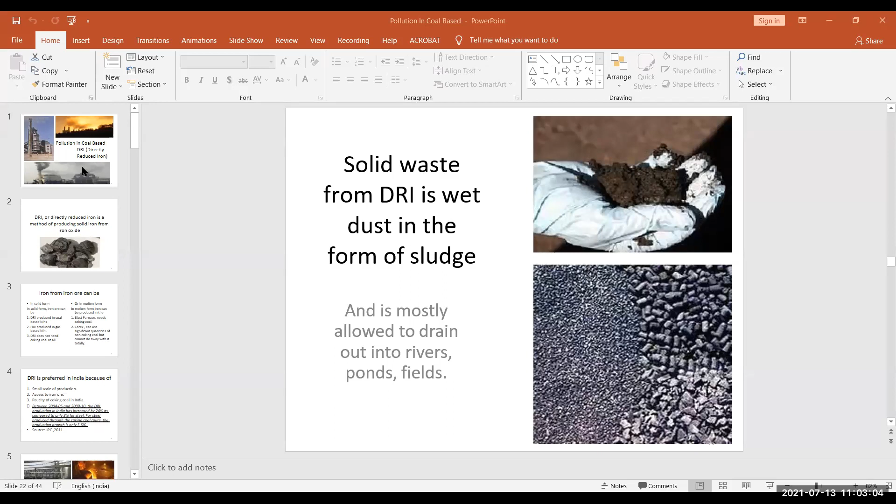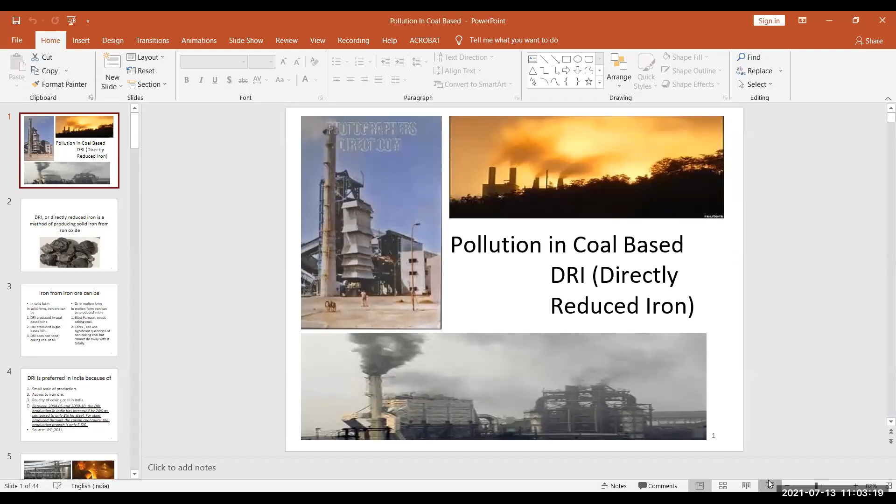Okay, now let's start with pollution in coal based. We already discussed some parts of coal based in the previous class. DRI means directly reduced iron. Okay, was my voice audible?

Yes sir, okay. Then now, what is the pollution in coal based? What is coal? Does anyone know about the pollution in coal?

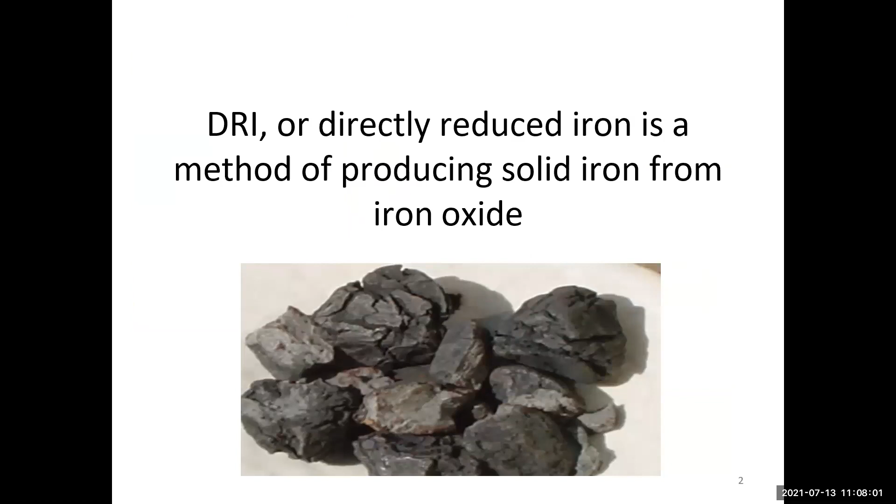Iron from the iron ore can be produced in solid form or in molten form. In solid form, iron can be directly produced in a coal-based kiln.

There is a kiln part, which is a part of the power plant, this is a very dangerous part. Okay, dangerous for the human body.

This black, this type of our particles, black particles are found in it, which move with the air. This is the very dangerous part of the power plant. This is the coal-based kiln.

Okay, HBI is produced in a gas-based kiln, and DRI does not need coking coal at all. Okay, this is the iron from the iron ore can be produced.

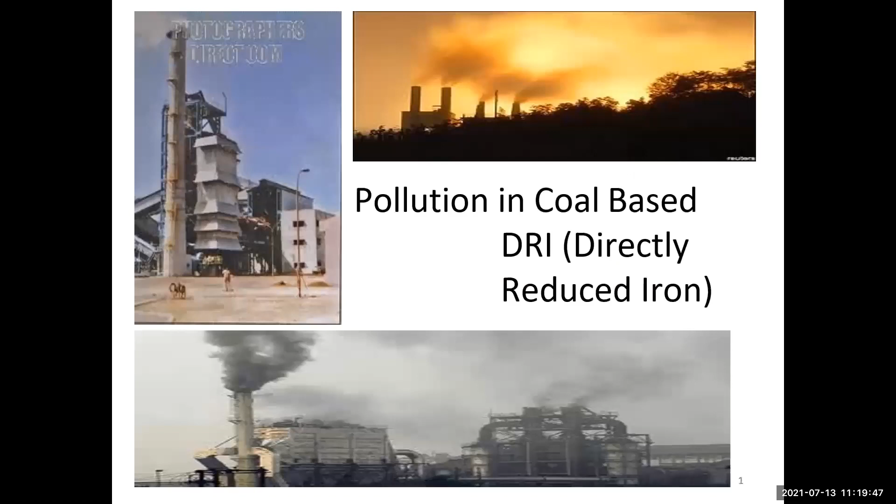Sponge iron is not useful by itself, but can be processed to create wrought iron or steel. The sponge is removed from the furnace called a bloomery and repeatedly beaten with heavy hammers, folded over, and the slag is removed.

Sponge iron is created by reducing iron ore without melting it. It makes an energy efficient feedstock, especially for steel manufacture, used as a substitute for scrap metals.

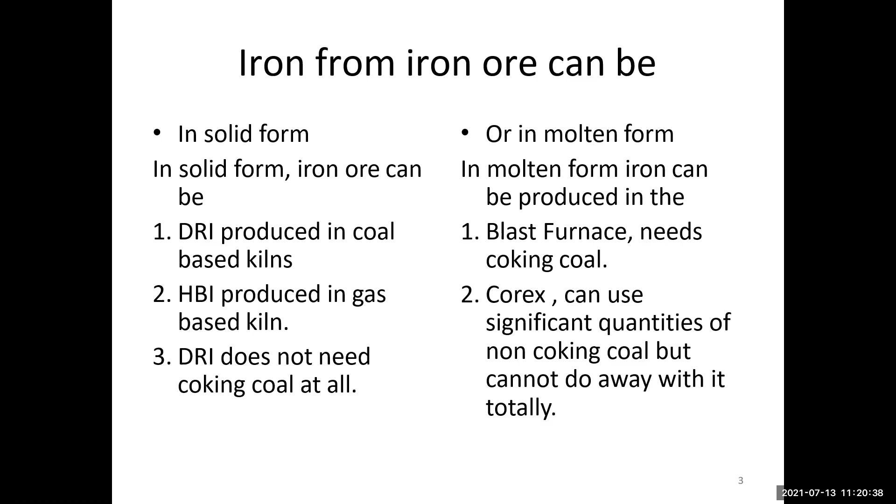It is now preferred in India because of small scale production, access to iron ore, and paucity of the coking coal in India.

Why do we prefer it? Because of small scale of production and access to iron ore.

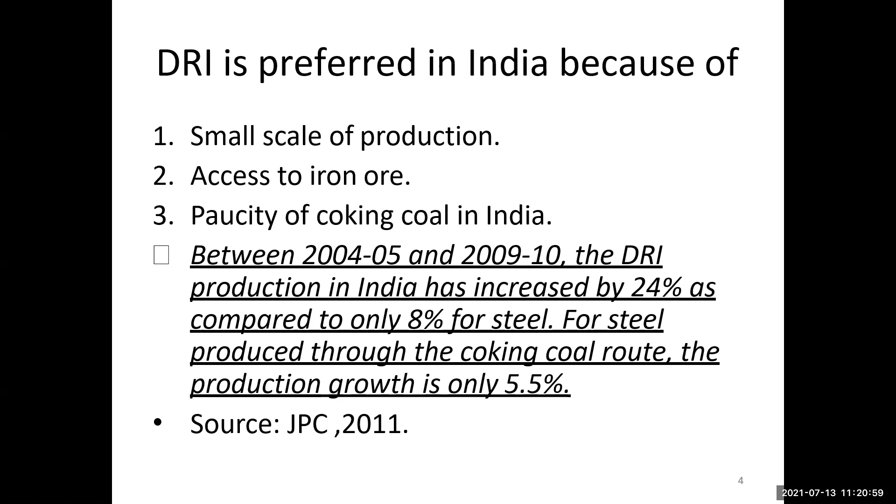In India, 27% of all steel is produced through coal DRI, through the direct reduced iron method.

Using the coal based method, 7% of all steel is produced through gas, and 20% is through the scrap route.

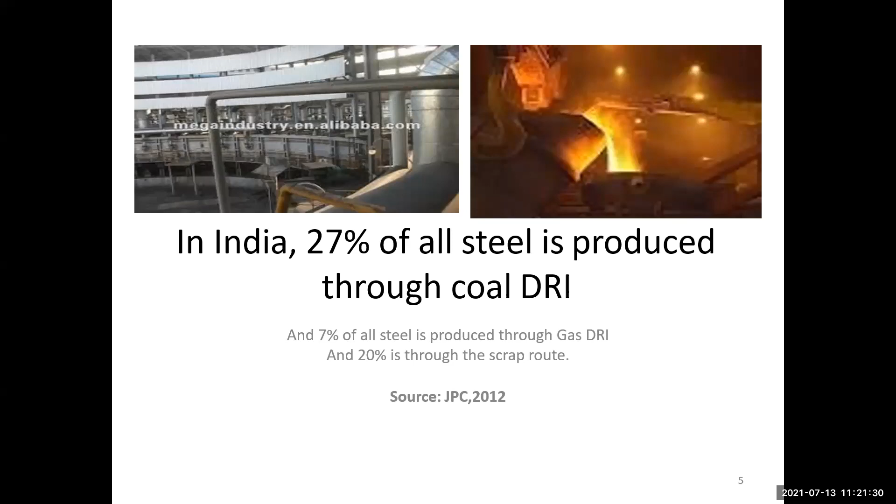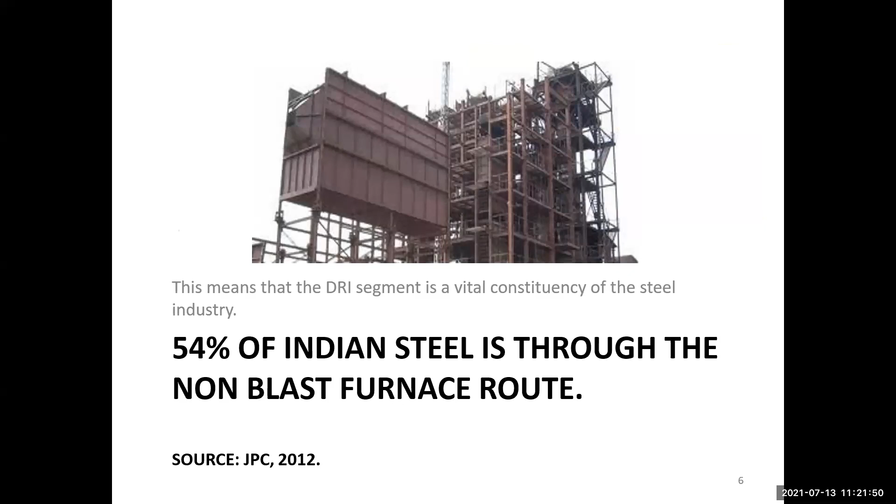India is the world's largest producer of DRI. India produced 28 million tons of DRI in 2010. If it produced that much in 2010, the current situation in 2021 would be double.

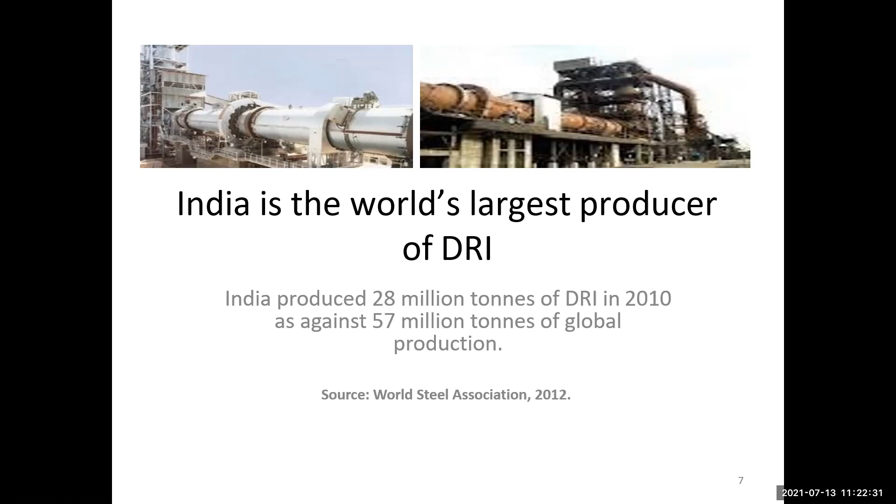DRI is produced and consumed locally. Being unstable in composition, DRI cannot be exported out or transported over long distances. Factories are located close to the raw material sources.

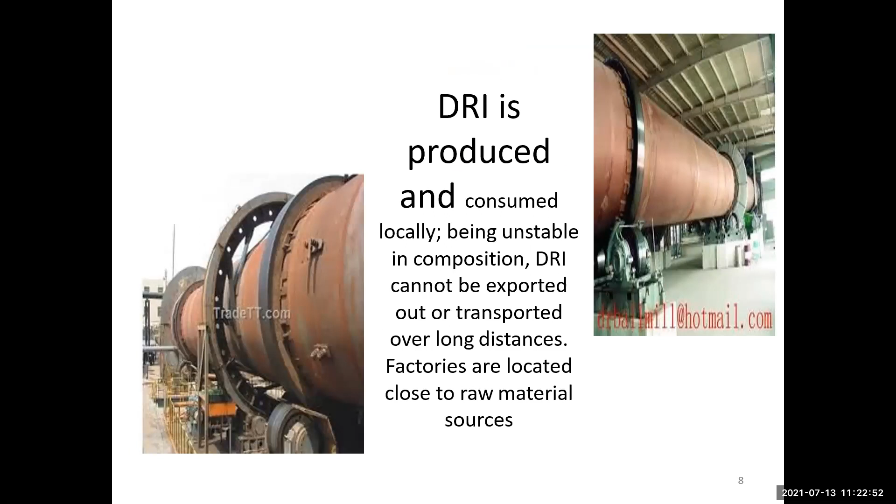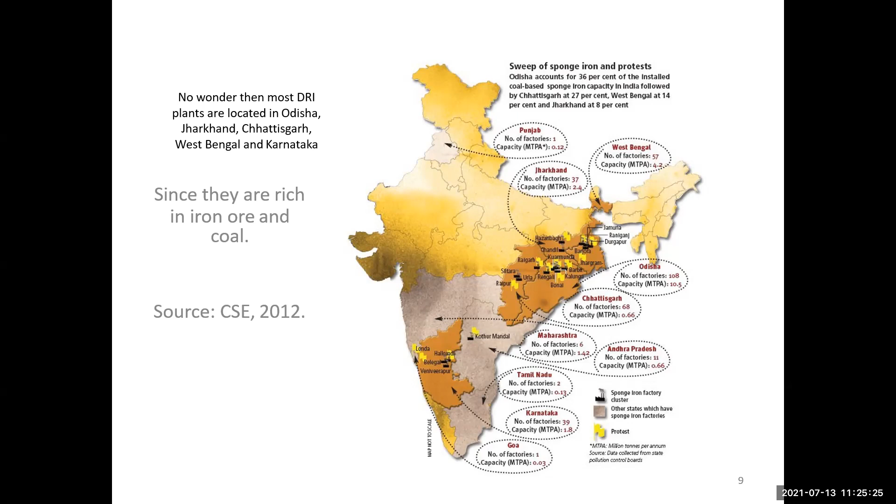This is the data you found from the State Pollution Control Board. This type of data you already receive from the SPCB. So this is the iron ore and DRI method.

DRI process - how to process DRI? First you get raw material: partly coal, iron ore, flux into the rotary kiln. Then it goes from the preheating zone to the combustion zone where coal is heated. The rotary kiln has a 2.5% slope and runs at 0.47 RPM speed.

Then it goes through the flue gas, then through the afterburn chamber, then the remainder coal.

Then hot air is charged from the rotary kiln, and then the solid iron and unburnt material go through the discharge line. Lastly, the cooler discharges the separated product, the particles are cooled and the product is discharged from the DRI process.

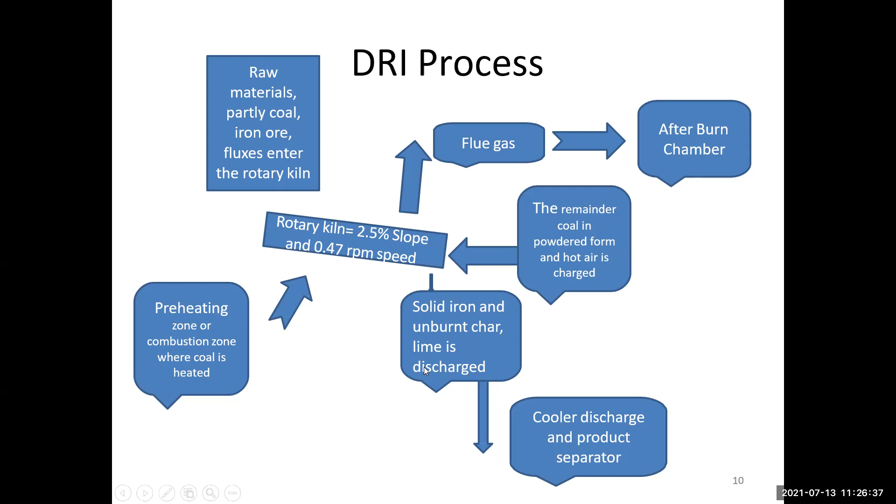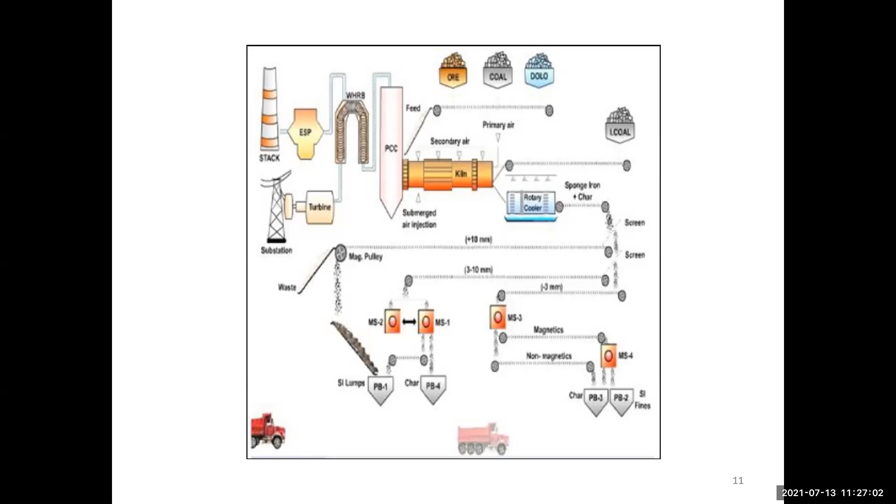These are the 7 parts available in the reactant gas route, and the DRI route has 9. All are available in the DRI route.

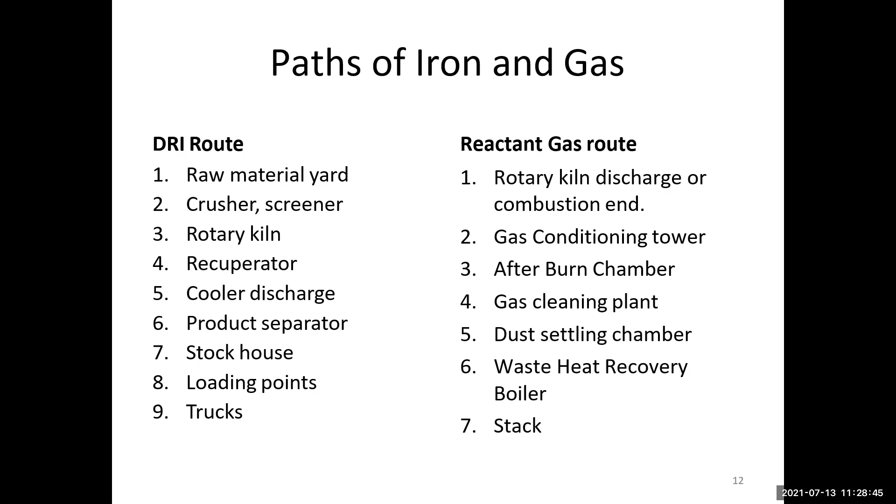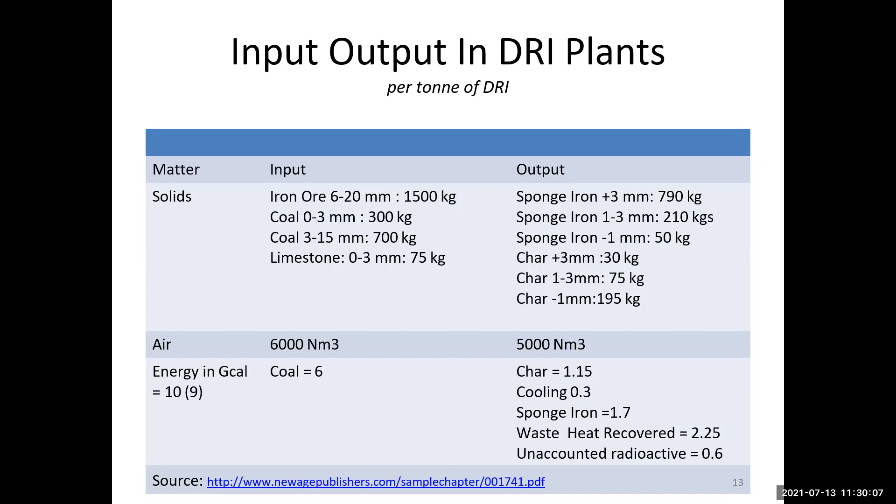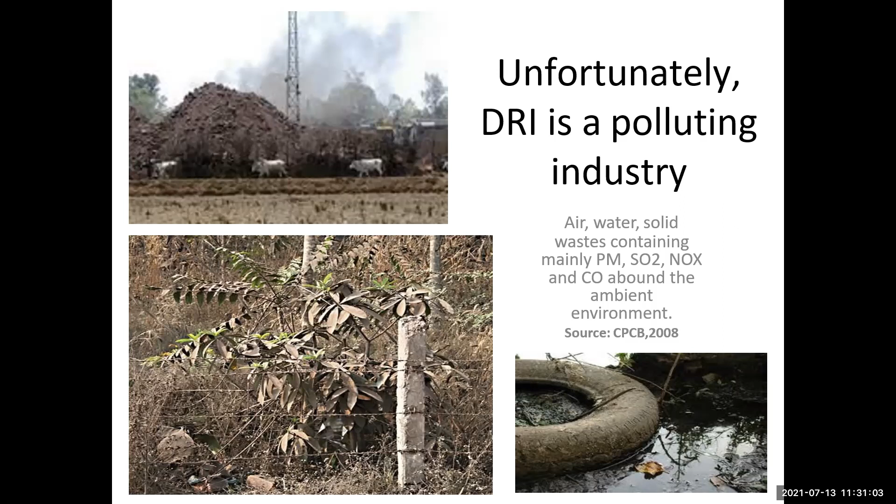Now, garbage factor per ton of sponge iron unit: 1.6 to 1.75 iron ore, 1.2 to 1.5 coal. Out of 1.6 to 1.7 iron ore input in tons, output is 1.8 to 2 carbon dioxide in tons. This is the garbage factor.

Then 1.2 to 1.5 coal, 0.25 dust, and 0.035 to 0.5 dolomite. This is 0.29 coal char. These are the tons in input garbage factor and the output is in tons of this type. So mainly your input of iron ore, you receive output in tons of 1.8 to 2 carbon dioxide.

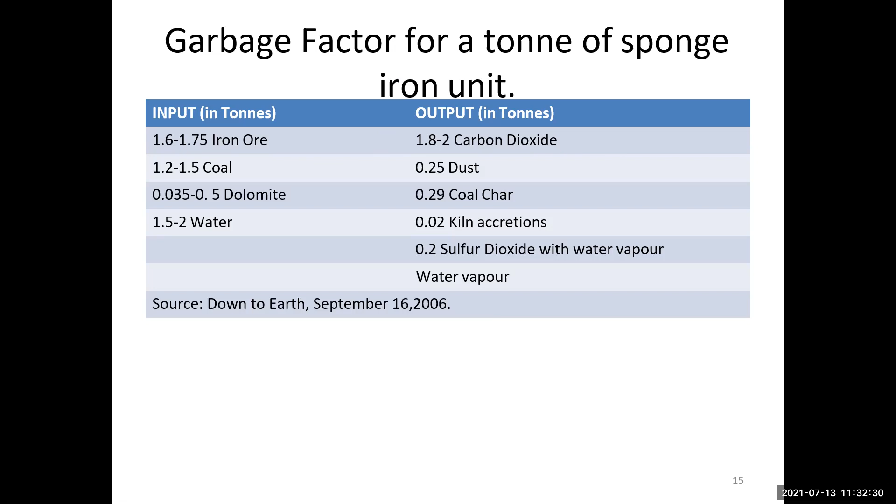Now the source of air pollution is process and fugitive: the combustion of coal in the preheating zone of the kiln, oxidation of the iron ore in the process zone of the kiln, and the flue gas from the kiln through the upper end, and dust of char and unburnt lime, sulfur, alumina, and others through the discharge end, and flue gas through the cap of the afterburn chamber.

Particulate matter from the ESP, electrostatic precipitator. All types of air pollutants such as coal based dust are received by the ESP, and ESP output is fly ash. After fly ash, in the market you get fly ash bricks.

The fugitive emissions come from raw material handling and the feeding area, recuperator in lieu of the WHRB discharge and the cooler discharge, product separator, and work area of the plant.

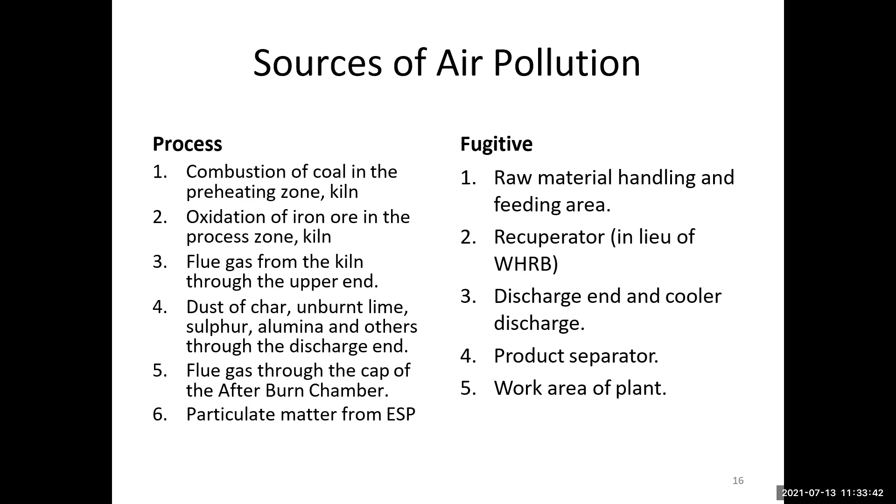This is the source of the air pollution: the dust collection center, its location and nomenclature, located in the raw material storage yard. The nomenclature is the stock house, which receives material, and the coal is crushed for charging as powder - this is the coal crusher. The iron ore is crushed to fit 5 to 16 mm size; this is received and the nomenclature is the iron crusher.

The raw material is sent to the plant's transfer points. As sponge is cooled by spraying water, this is the cooler discharge. As sponge rests before screening and separation, this is the intermediate bin. As sponge is separated from the char, this is product separation, and the product is stocked in the product house. These are the dust collection centers.

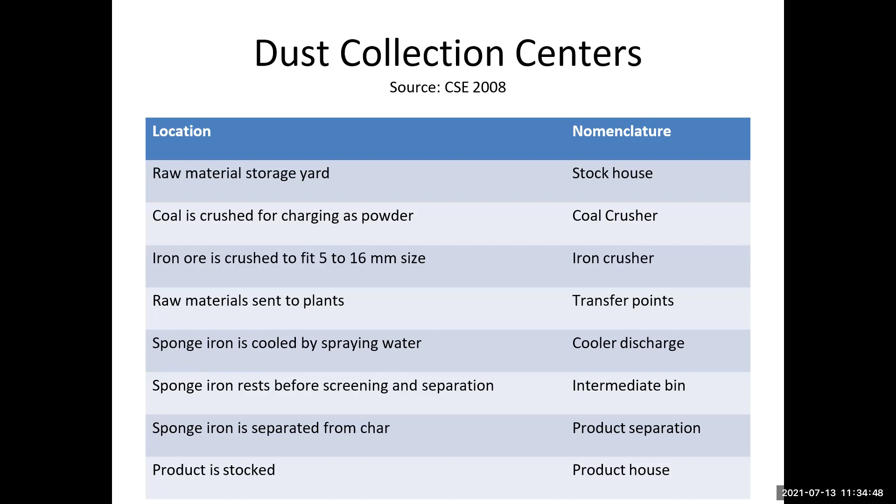This shows which type of dust is collected in which center, the nomenclature of the center, and the local raw material storage yard. These are the norms of air pollution, as seen in the process.

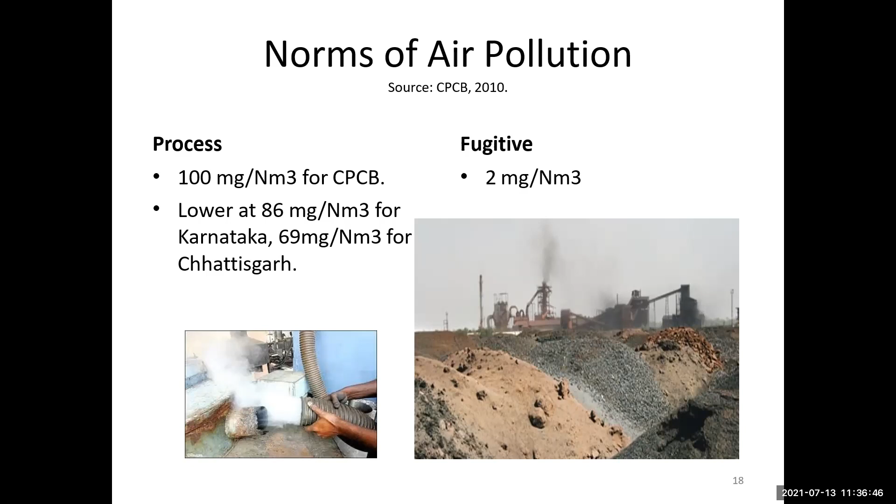The source of water consumption and pollution: water consumption from the rotary kiln cooler, cooler discharge, gas cooling, and circulating water - the water used to cool the kiln is again used to cool the cooler discharge and flue gas. Make-up water is kept in reserve. This is the water consumption.

Regarding water pollution: the cooler discharge contains solid water particles and waste particles. Gas coolers also contain solid particles. Some sulfides are mixed irretrievably into the water. Water is sprayed on dust while dumping it into trucks, and the water used in gas scrubbing may contain PAH compounds. This is the water pollution from the water consumption part, which is the rotary cooler - the cooler discharge contains solid waste particles, and the gas coolers contain solid particles. So this type of pollution comes from the water consumption.

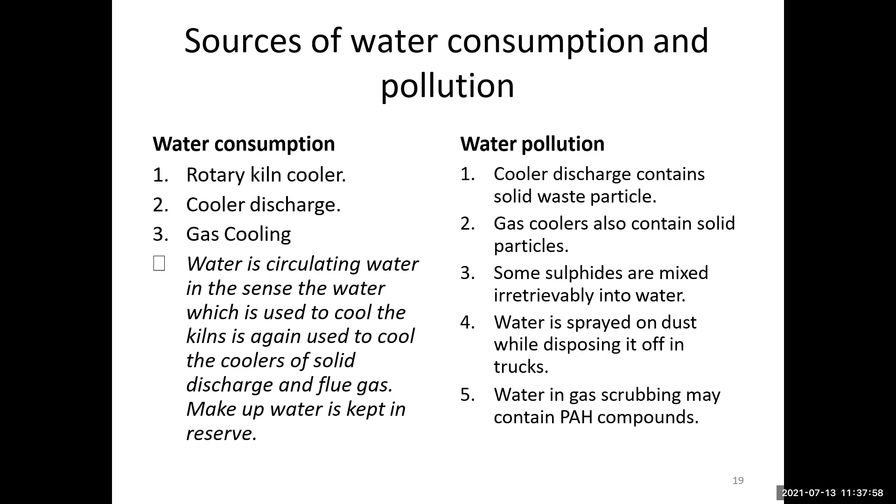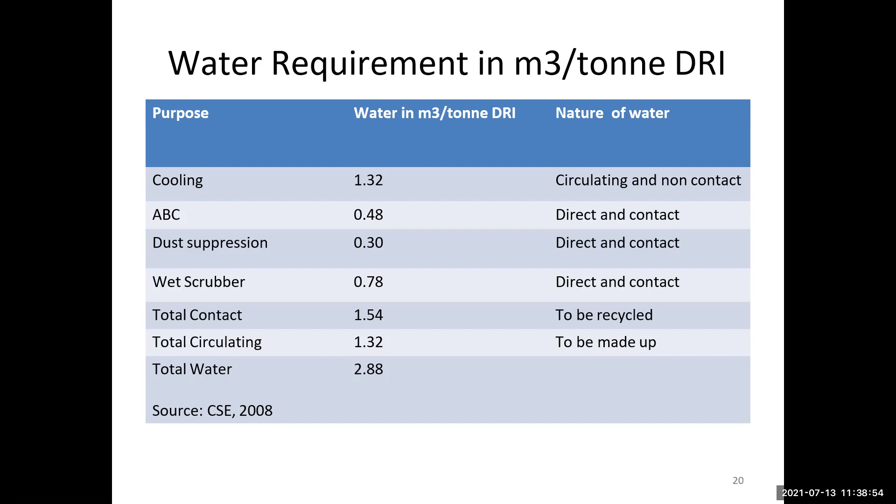This is 7 kg per ton DRI of solid waste. Solid waste from DRI is wet dust in the form of sludge, and is mostly allowed to drain out into the rivers, ponds, fields. The solid waste, the wet dust from DRI, is used as sludge. You can see in the image the sludge being discharged by hand from the bottom, and the second image shows the river ponds and this type of waste.

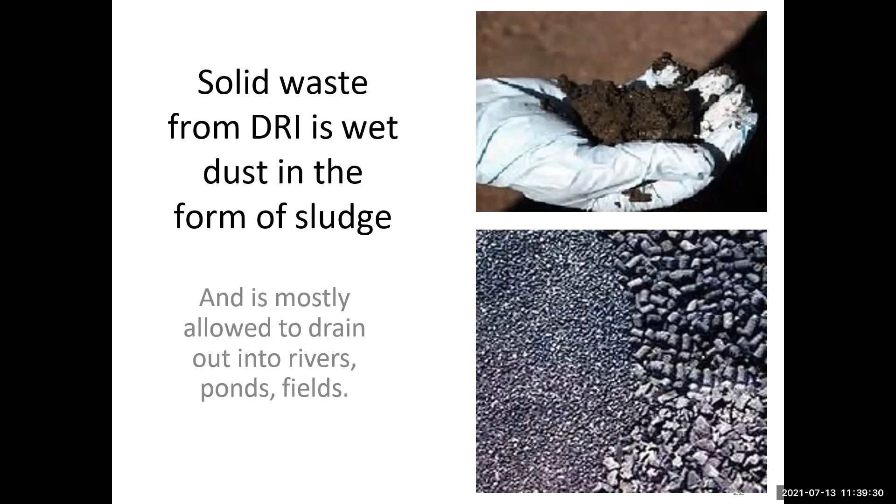Solid waste in DRI plant, source CSE, June 2012.

These are the sources and causes. The ESP dust is due to incomplete waste heat recovery and gas cleaning, and dust settling chamber includes raw materials, incomplete combustion of coal, and poor oxidation of ore - due to physical fall of materials, poor waste heat recovery, poor quality coal, non-preheating of material, and over-oxidation in ore due to presence of sulfur.

And the stack contributes 11% - this is the percent of total dust, its source, and cause.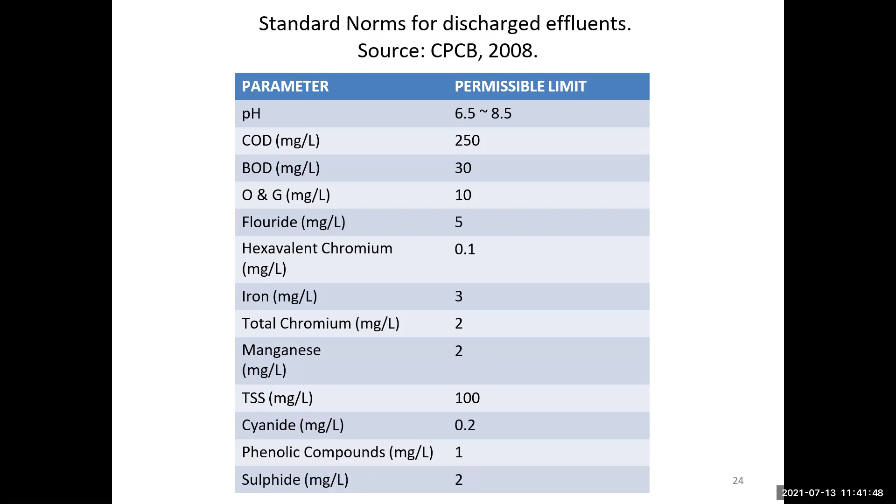This is the pollution from the sponge iron industry, which is the core reason communities rise up against the industries. Though some people create this type of pollution from the industries, this is the core reason communities are against the industries.

This is the parameter.